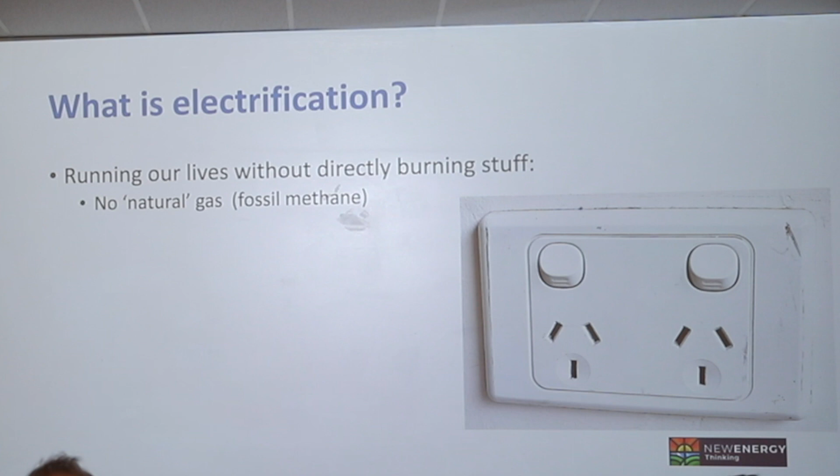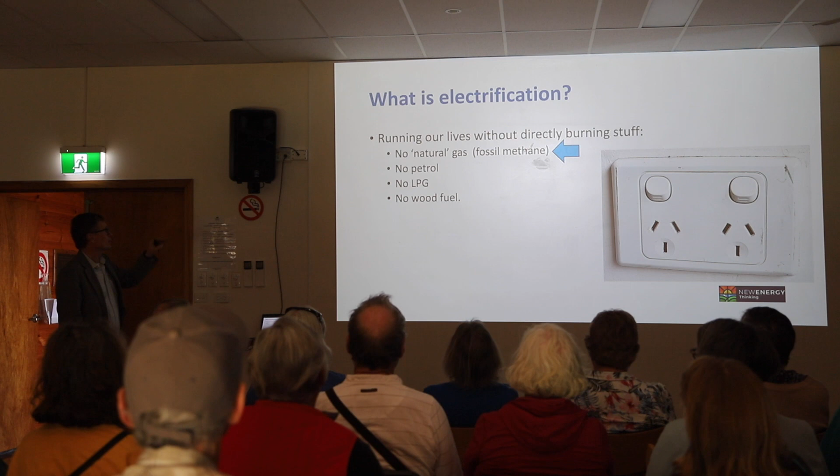So let's launch into it. So what's electrification? It's gaining some traction and some currency at the moment, this idea about running our lives without directly burning stuff. So what's that mean? No natural gas — natural gas is, of course, a marketing term for fossil methane. No petrol, no LPG, no wood fuel. So there's a whole raft of different topics there, but I'm mainly going to focus on the first one.

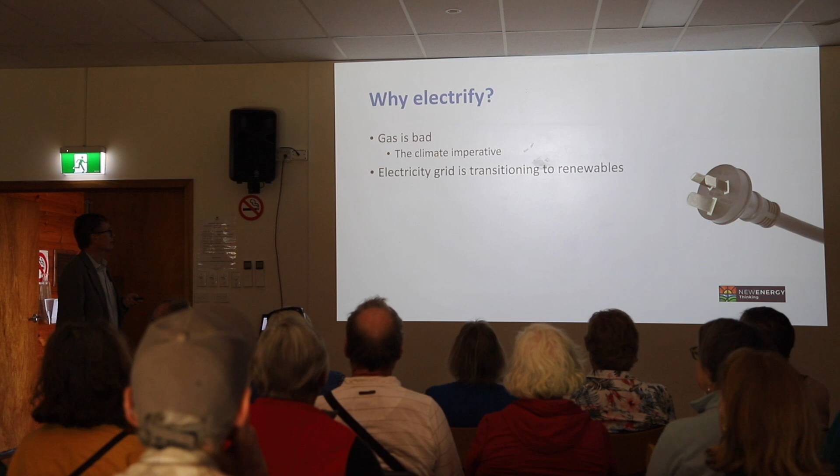Why electrify? Well, gas is bad. There's a climate imperative, and more about that in a second. Everyone knows that the grid is transitioning to renewables and that it's happening fairly quickly. To electrify is cheaper, because in conjunction with solar PV it makes our energy cheaper. Electricity is more efficient than gas.

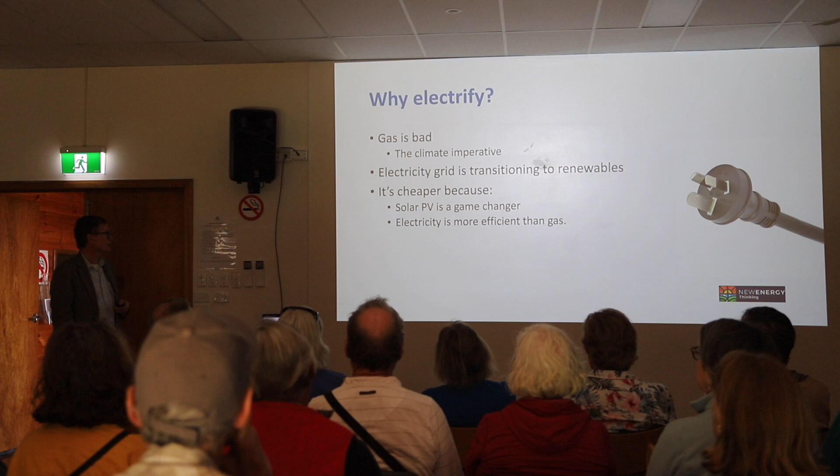And to the point about gas being problematic, I like this quote from Rachel Golden of the Sierra Club: 'There is no pathway to stabilising the climate without phasing gas out of our homes and buildings. This is a must-do for climate and a livable planet.' So that hopefully puts a sobering perspective on this exercise.

So there's a myth around gas that it's a clean, cheap fuel. The reality is that it's inefficient, and it's associated with high end-to-end real-world emissions.

Victoria's bounty of cheap gas out of Bass Strait is in its sort of twilight years. There's reports just last week about the reduction in production out of Bass Strait. And what we're not getting out of Bass Strait is made up in Australia coming out of unconventional gas fields, a lot of it in Queensland.

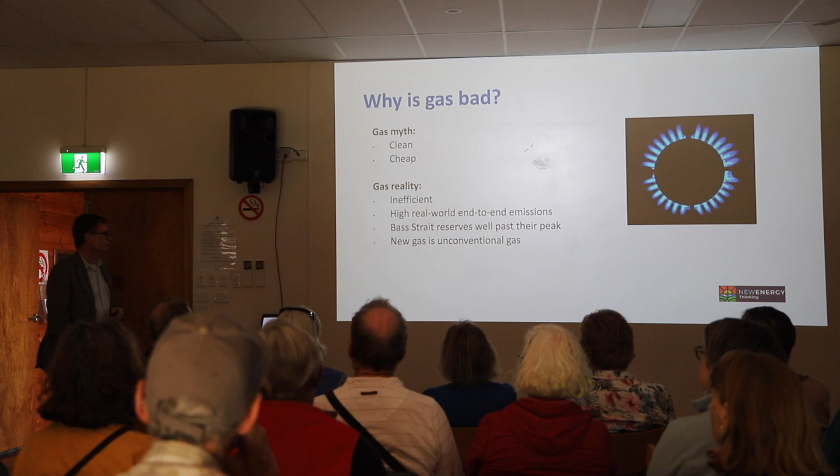Many people might not be aware, but these days the gas network on the east coast of Australia is all interconnected. So there are times when gas is pumped out of the gas fields in Victoria and ends up in Queensland. Other times it's coming the other way. In winter, when we can't produce enough per day, the shortfall is made up by gas coming out of the unconventional gas fields in Queensland.

So that gas is dirtier, and the price of gas is going up. So I just wanted to give a little bit of a picture of why I say that gas is dirty.

The emissions footprint of gas comes from a number of places. The one that most people are aware of is the emissions from the complete combustion at the point of use — that's the headline source of emissions of gas, that's what most people think about.

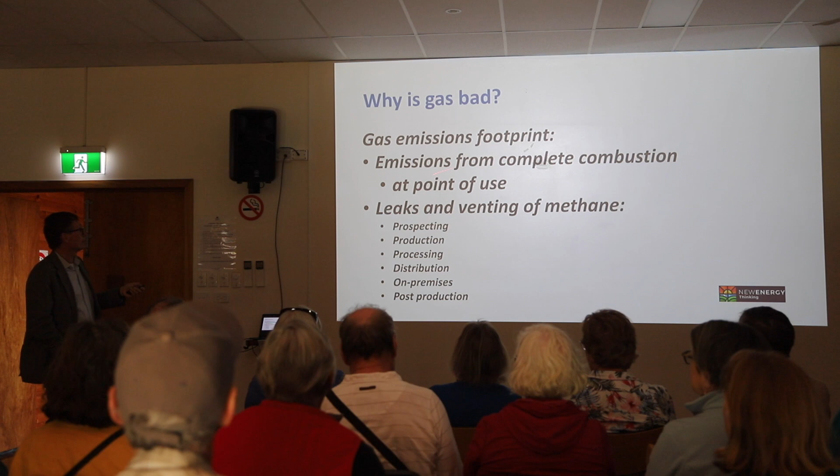But there's leaks and venting of methane in the prospecting, the production, the processing, the distribution on premises and in post-production. And a lot of that is overlooked and underestimated. That's a bigger problem than most people realise. I've been paying close attention to this for the last 10 or 12 years, and I don't see enough general awareness of that. It's not just about combustion, it's a lot about this leakage too.

To help put that in perspective, the methane that's in the atmosphere — when we talk about emissions and render them in terms of tons of CO2 equivalent, the CO2 equivalent amount of emissions is the corresponding mass of methane out of the ground multiplied by the global warming potential. So it's pretty simple. And as I see it, there are problems in the estimation of this because of the leakage I was talking about, and there are also problems on this side as well.

So just about the global warming potential, without nerding out too much, Australian standards for emissions accounting apply a global warming potential of 25 when reckoning the emissions from methane. And that's because the residence time of methane in the atmosphere is much less than carbon dioxide.

Scientists don't just have one number for crediting the global warming potential of methane. They look at two different time horizons: 100 years or 20 years. If looked at over 100 years, it's 25 times worse per kilo than CO2. But looked at over a shorter horizon, it's much worse.

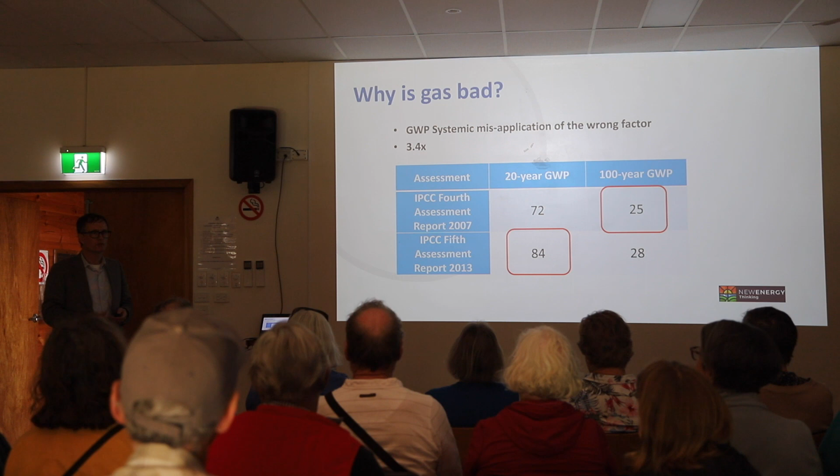So moving on—and just in case it begs the question about why we want to electrify: electricity prices are going up, so why would we electrify? Well, the answer is we still want to electrify even though electricity is going up, and that's because it's gas prices that are largely responsible for setting the price of electricity. A lot of people aren't aware that it's the marginal price of gas that tends to set the electricity price when the supply of electricity is tight, shall we say.

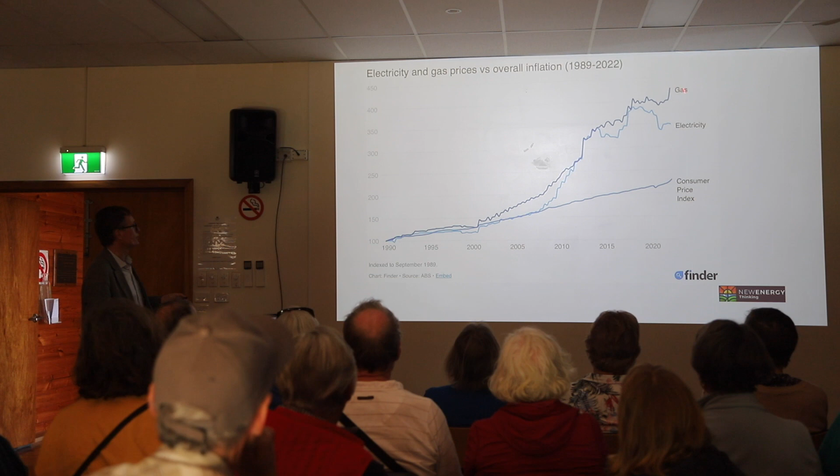And you can see in the last few years—this only goes up to about 2021—the gas prices continued up while the wholesale price of electricity came down a bit. Since then, both these have jumped up again. Thanks, Vladimir Putin. Okay, let's bring this back to a household scale.

What's a good goal for homes in this context of electrification? I suggest that it's to be net energy positive and all electric. What does that mean? Net energy positive means generating more than we consume. Of course, that's possible because of rooftop solar—it's now become familiar, doesn't need explanation. Net energy positive can also come about in conjunction with reducing our consumption. So it's that increase in generation plus a reduction in consumption, and the two together mean we can be consuming less than we generate.

When that happens, good things change. To put that in perspective: for a home that's not net energy positive, the grid is strictly a supply system—a thing we get energy from, full stop. But when you're net energy positive, your perspective about the role of the grid is different. The grid is a sharing system, not just a supply system. And that mind shift is useful because you're depending on the grid not just to give you stuff but also to take your surplus and share it with your neighbours. In that respect, the role of the grid is fundamentally different.

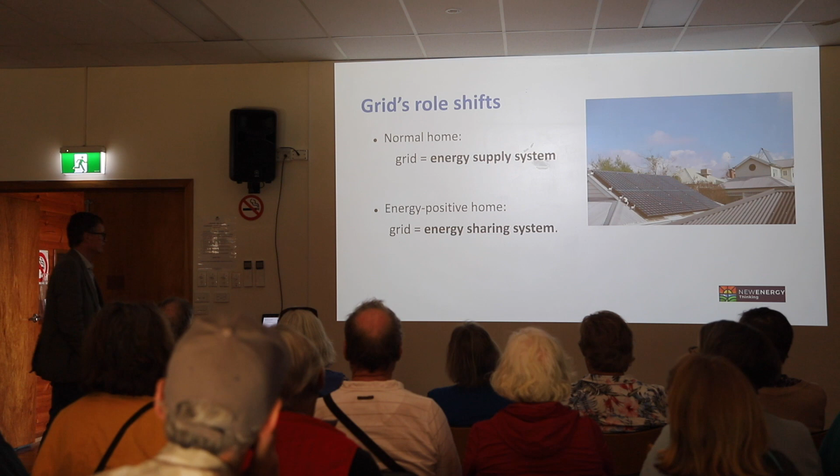The changes we make when we improve our homes involve improvements in comfort, a reduction in cost, increase in the value of a house, and a reduction in emissions associated with operating the house. So in a very real sense, the changes we make represent an investment, not a cost. We have to take this investment frame of mind, that money spent isn't just an immediate cost, it's a long-term view. We can compare it with money in our super, property, or shares.

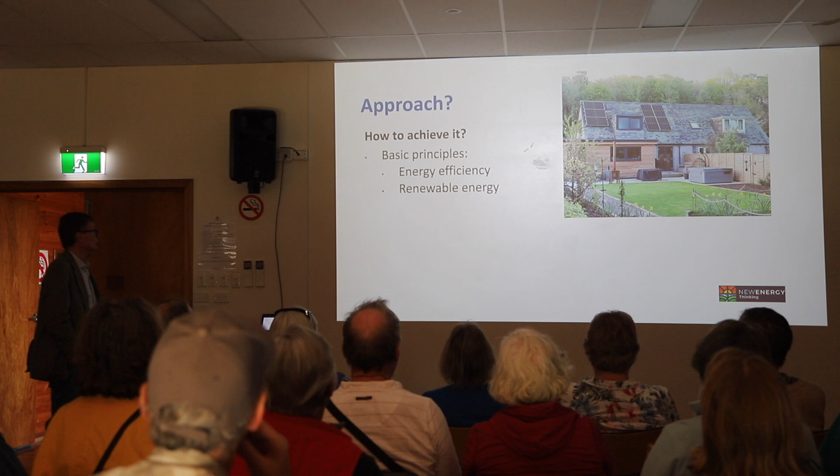So how do we achieve this? Basic principles: energy efficiency, renewable energy, and not burning stuff.

I wrote a book called The Energy Freedom Home, which Sharon's brought along a copy of. Hopefully it's available at the library. In that book I divided the whole problem up into 9 chunks, framing generating solar and the other home improvements as all part of one bigger activity. Looking at those things together holistically, I think, is important.

The first of the 9 steps is lighting, and I'm going to go through just those 9 steps over the rest of this talk, hopefully giving you some ideas about ways to improve your house, largely drawing on my own experience. I got my home off gas and made the efficiency improvements to my own house between 2006 and 2013, and since then I've been helping other people do it. So what I'm going to talk about now comes from that experience.

So, lighting. Obviously people are aware that we can upgrade old lights with LEDs. We can do that before waiting for them to fail.

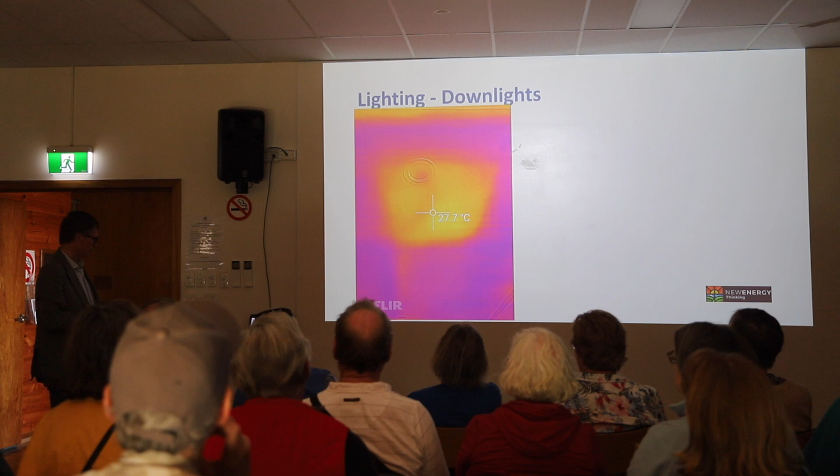So the right thing to do is... let me come back to that. This is a thermal image taken at a client's house. You can see the downlight there, and around it is a heat signature showing missing insulation. That's what it looks like on the other side. Where old lights were present, it was necessary for that insulation to stand off from the light for safety reasons — we don't want the insulation catching fire and burning the house down. Installers of insulation are very aware of that.

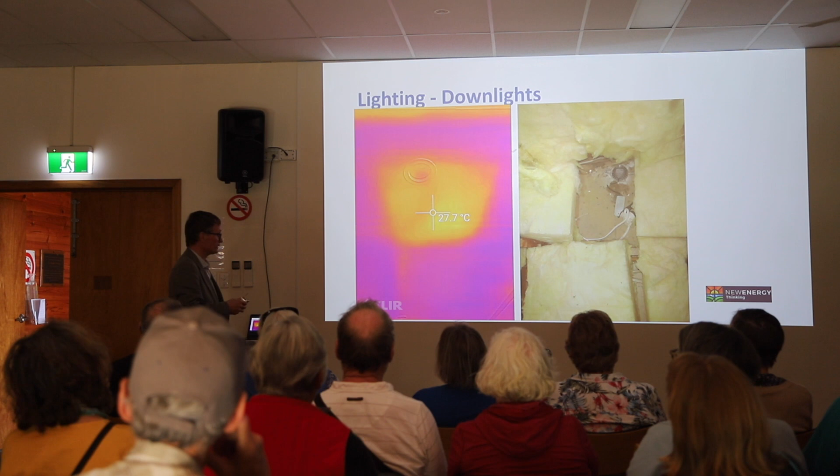Now that lights have become a lot more efficient, that risk is going away, but it's not completely gone. If one of these fittings had an LED in it, there's nothing stopping someone coming back and putting an old-fashioned halogen in there. That's the reason why you don't cover these, even though there's an LED in there, because you don't want someone mistakenly putting a halogen back in and burning the house down.

The other problem is the fact that these are ventilated. This fitting, as you can see, is gimbaled, and there's a slot around the perimeter that lets air through. This bulb itself has a ring of slots that ventilates the bulb. So perversely, when this halogen was replaced with LED, you can see present there now, it made it worse in terms of ventilation. You get that perverse problem where increasing lighting efficiency actually makes another problem worse.

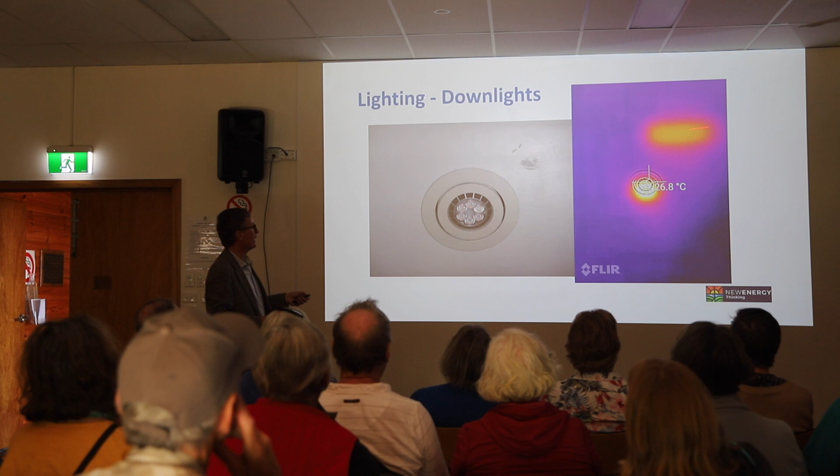So we've mentioned that lighting efficiency is a problem, that the insulation effect is a problem, that ventilation is a problem, and there's a fourth problem. In this thermal image you've got the heat signature of the light itself, but anyone want to hazard a guess what that hot blob there is? It's the transformer sitting on the plaster. Exactly — so there's a fourth problem, that the old iron core transformers themselves are a heat loss, an energy loss.

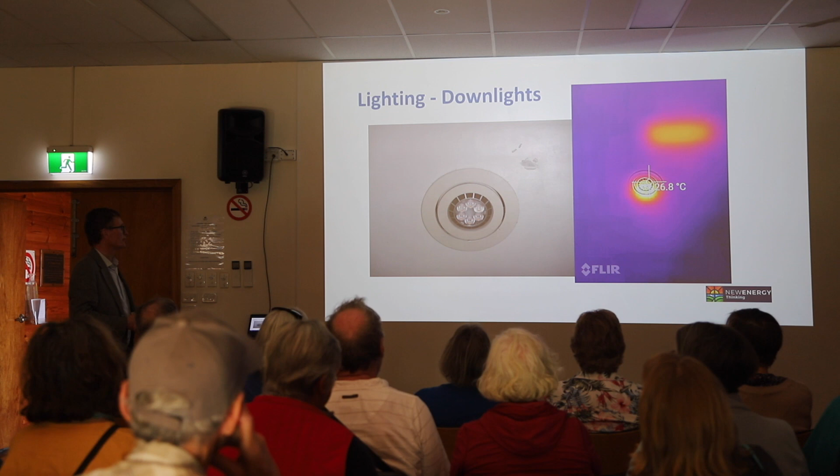So the moral of the story is, don't just replace the bulbs — you need an entire new fitting. This is a typical one, which I call a sealed unit, so there's no replaceable bulb. What you want is for it to be IC rated — IC stands for insulation contact. As the name suggests, if it's rated IC, then it's safe and legal to cover. If you don't see that rating or that picture, then don't cover it, even if it's an LED.

So yeah, I'll pass that around.

This has a little box that's electronics, so that would go on top of the insulation, and an electrician would have to come through and put a plug base socket in the ceiling. Then these are a plug in socket arrangement, and if this fails, it's just replacing a device plug in the socket, so you don't need an electrician to replace the failed units. These aren't much more expensive than just a halogen or an LED bulb, so that's why replacing the entire fitting is the right thing to do, not replacing the bulb. I'll pass that around.

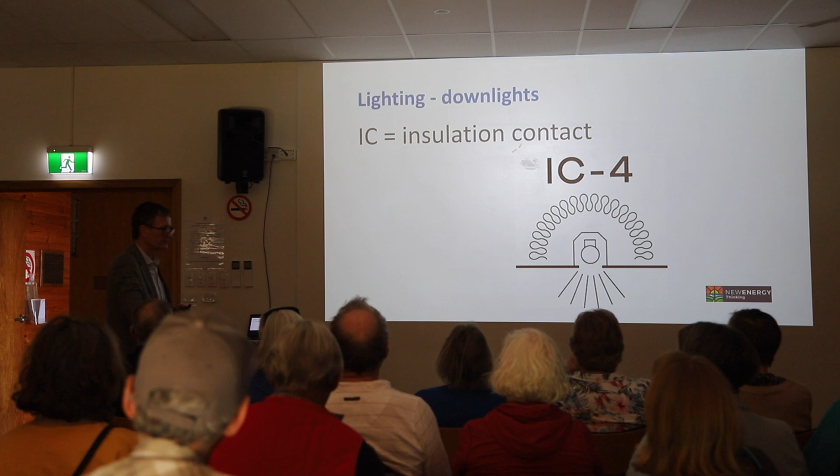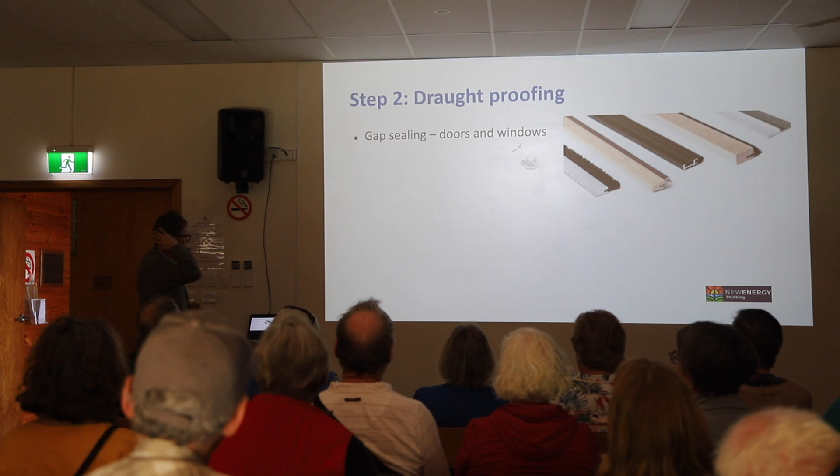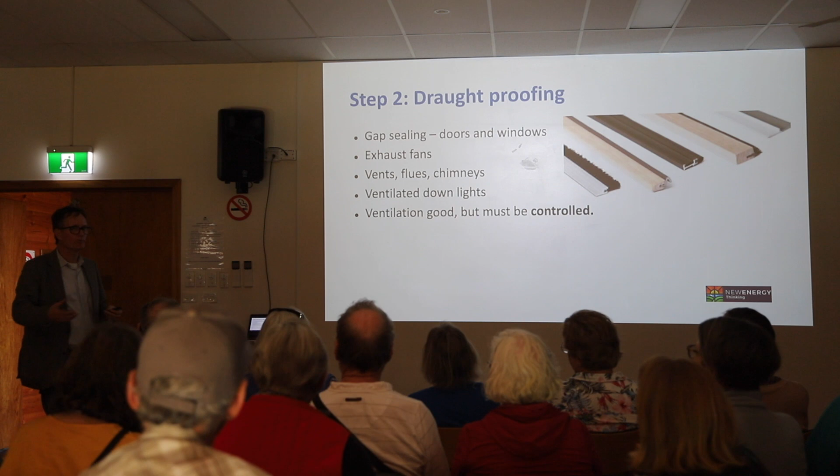Moving on to the second step, draught proofing. This is something that's often done badly. Gap sealing doors and windows is important - exhaust fans, flues, vents and chimneys, ventilated downlights. There are lots of sources of draft in a house. Ventilation is a good thing, but it needs to be controlled. On a really hot day or a really cold day, you want to be able to close the house up tight, because unless it's closed up tight, you're going to exchange a lot of air with outside, and you're not keeping the conditioned air where it should be. Controlled ventilation is had by opening windows, not by letting air through a hole in your ceiling that shouldn't be there.

Pipe penetrations, like under a sink where something might go through the floor, or chimneys - lots of air can exchange with outside through the chimney. Wall vents - unless you've got a source of combustion within a room, these aren't necessary. New houses aren't built with them. Old houses were built with them because of the possibility those spaces had sources of combustion. No source of combustion, no need for these.

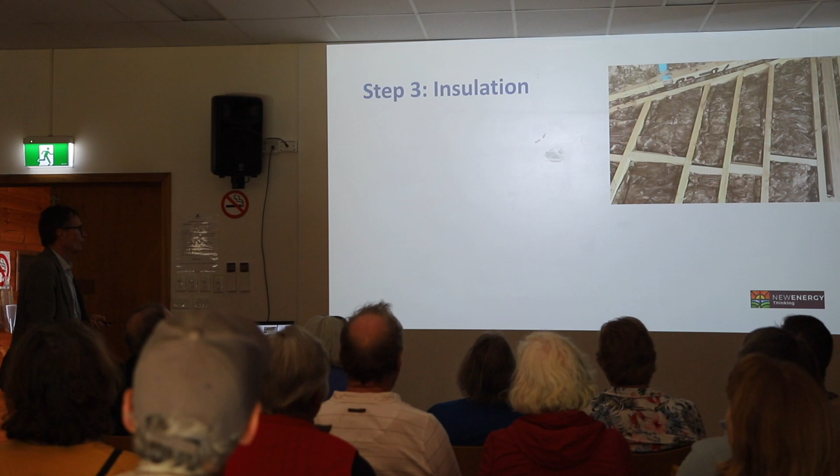Insulation. Everyone understands the role of insulation in ceilings, but it's often done badly. The thing to appreciate is that common guidelines are a minimum - when we talk about 6-star homes, that's not an exemplar of great efficiency. Ceilings need a net effective level of about R5, that's a good goal.

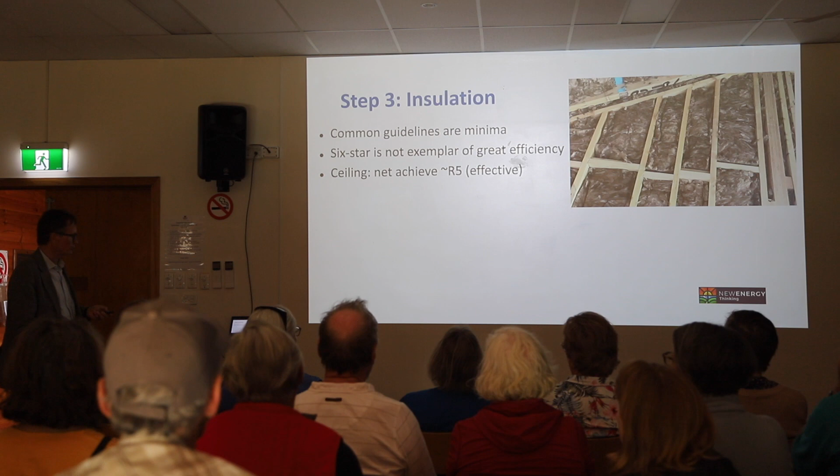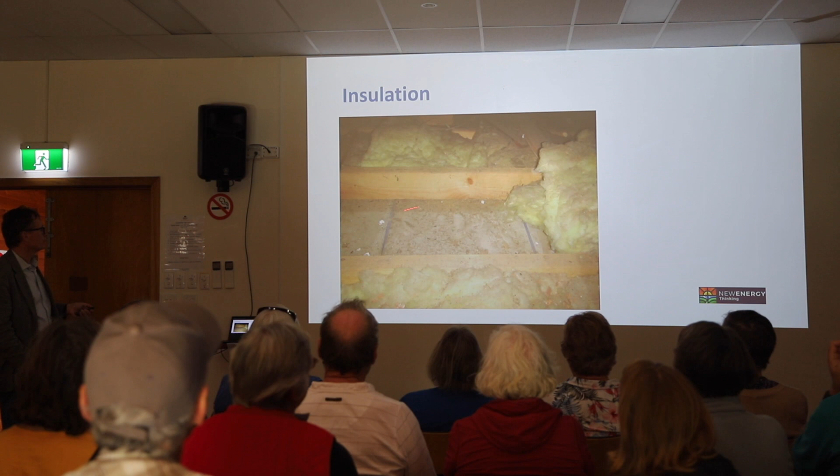Walls and floors try for about R2.5, but in practice I get into people's roofs many times a week, and I see this sort of thing, where there's insulation that's been removed for no good reason.

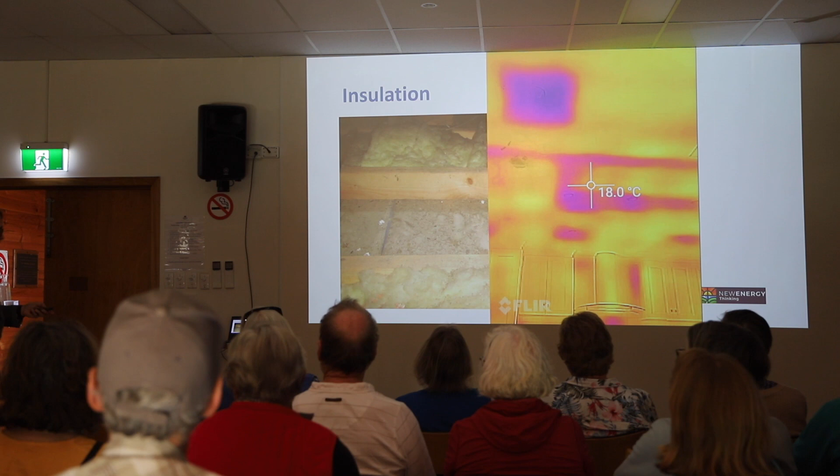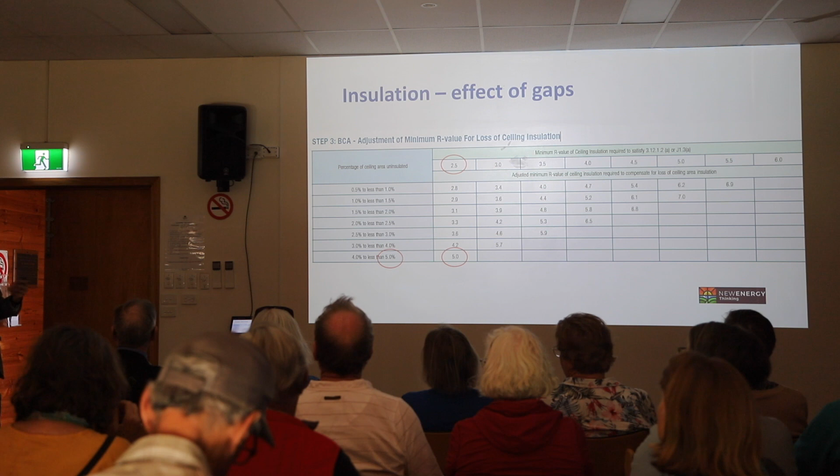Believe me, I go into the roofs of new houses often, and I see a lot more than 5% uncovered. So as a rule of thumb, most houses, even new houses, aren't achieving more than about a third of the level of effective insulation people think, because it's not uniform and continuous out to the edges and around things like ceiling vents and downlights and other fittings.

Windows, on a per square metre basis, are a weak link in the thermal envelope of a house, so it's important that they not be too big. Everyone's aware of double glazing - two layers with something in the middle - as a way of improving window performance. You might not be aware of secondary glazing, we'll talk about that in a sec. Curtains and blinds also play an important role, as does external shade.

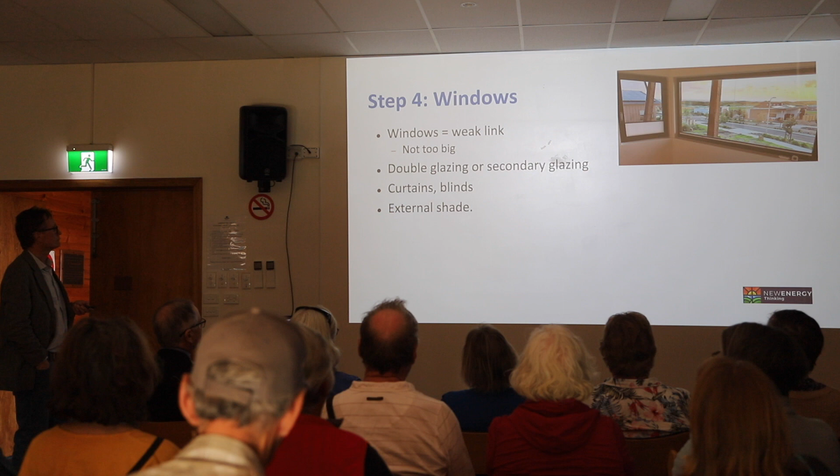This is a picture taken from a client's house a few years ago. This house was only a couple of years old when I was called to inspect it. The people thought they'd built an efficient house, but it wasn't performing well. It was up near Daylesford, and they asked me to come and find out why their house was no good. Anyone want to hazard a guess why that's a problem? No window coverings, and too much window - just way too much window.

Yeah, even though that's north facing, it's too much glass and nothing to cover it when the sun goes down. So: oversizing, and no window coverings.

I mentioned secondary glazing. There's more than one way to get the effectiveness of double glazing, and secondary glazing is the idea that we can add another glazing layer onto existing windows. The picture shows a sample of a product called EcoGlaze that I've sat in someone's window reveal, just to demonstrate how it sits. You can imagine that extending in all directions and adding another layer, with an air gap between it and the glass. This is held in magnetically.

There are different variations of this system that suit different types of windows. This version of the EcoGlaze product suits fixed windows - there's another one for sash windows, another for awning windows. But the point is that you don't need to throw away existing windows entirely and replace them with new double glazed ones. You can get decent performance and retain the investment in your existing windows, without discarding stuff that's otherwise okay.

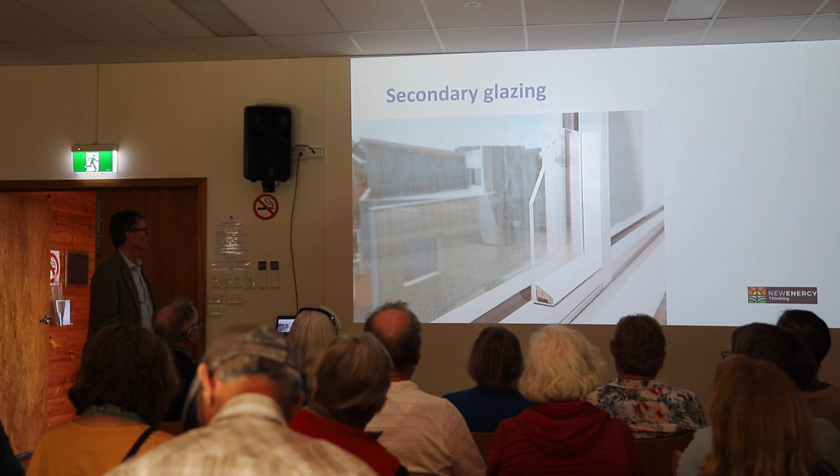Window coverings: the way I look at it is that double glazing or secondary glazing is necessary but not sufficient for thermal performance.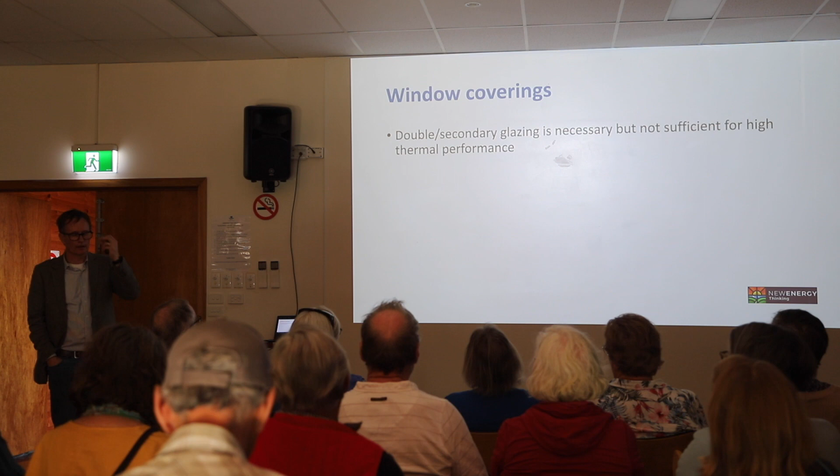I tell people that going from single glaze to double glaze takes windows from being terrible to just being merely bad. It's important to realise that double glazing by itself is not a good insulator. That surprises a lot of people because they have double glazing up on a pedestal as being amazing, but in practice it's nowhere near as good as a wall. So going from single to double is necessary, but it's not enough.

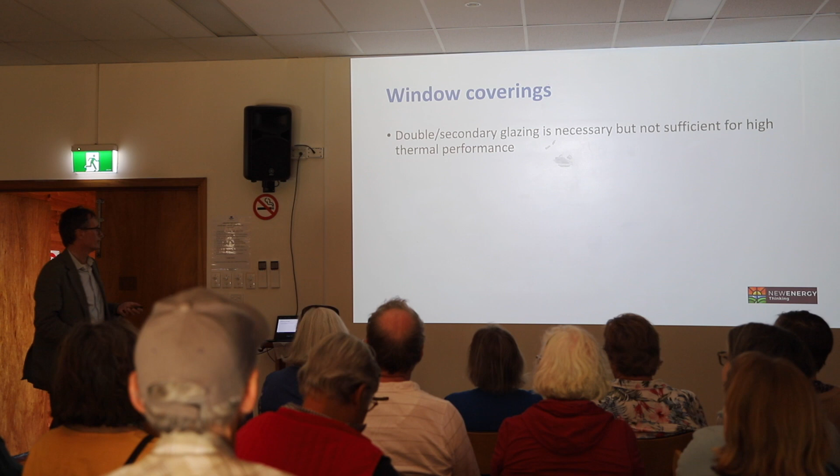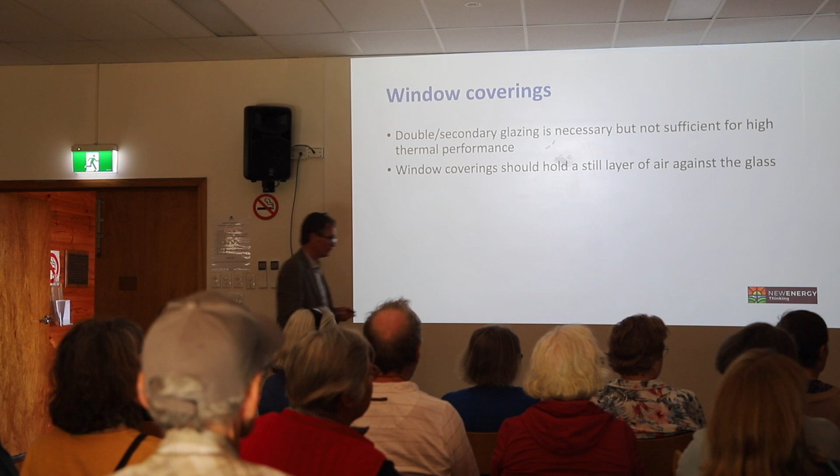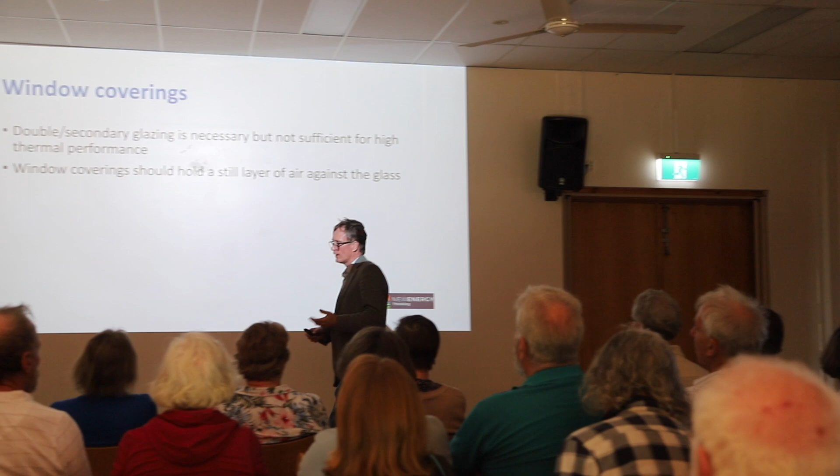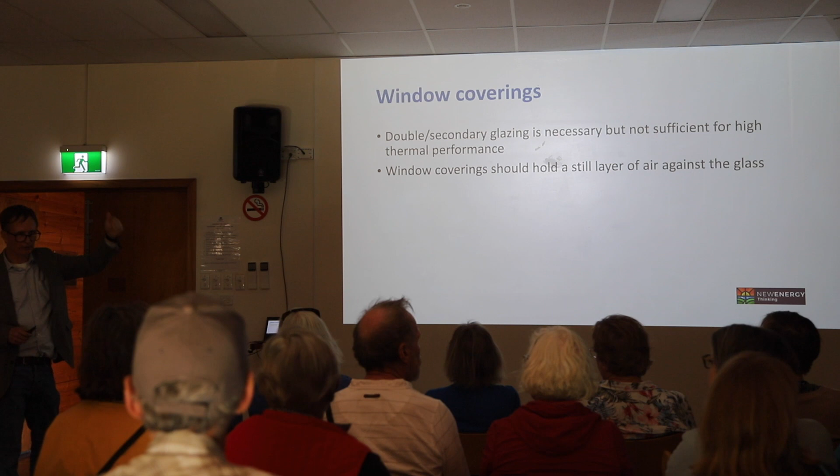We need window coverings that can hold a relatively still layer of air against the glass. Take these roller blinds, for example. These are an example of what not to do, because air between the glass and the blind can pass easily up behind the roller and over the top. And to the extent that air there wants to move, it's going to move vertically, driven by the temperature difference between inside and out. That's called natural convection. In a winter situation, the inside air cools in contact with the glass and sinks, drawing in air over the top. With roller blinds like that, that movement is very easy, and that's what you want to stop.

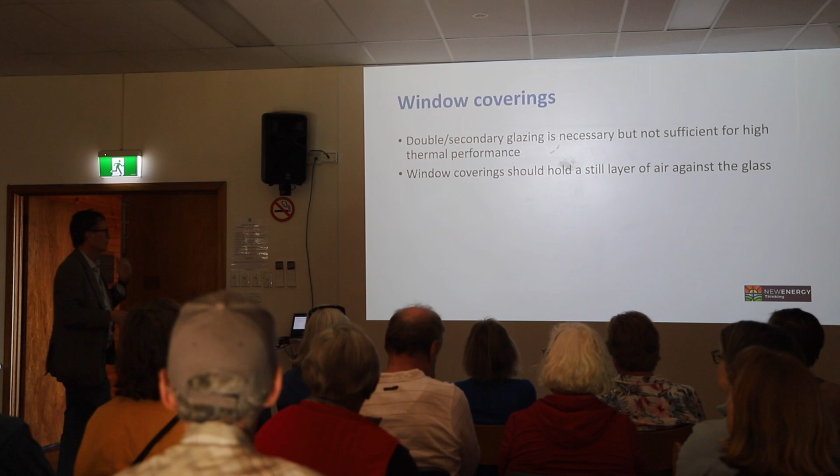That's why internal window coverings are really important, and choosing the right ones can make a huge difference. Cellular blinds are the best.

Appliances and cooking: you may have redundant devices, so turn off things you don't really need. Consider efficiency when buying - use the star ratings. Induction cooktops are much better than gas, with much higher efficiency.

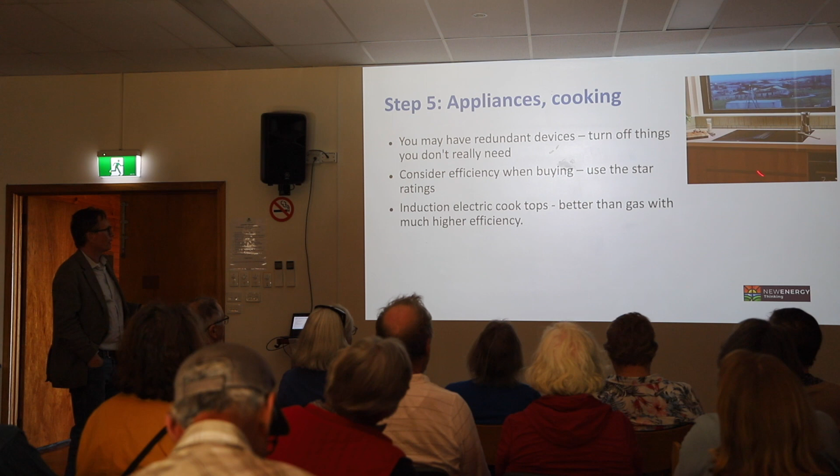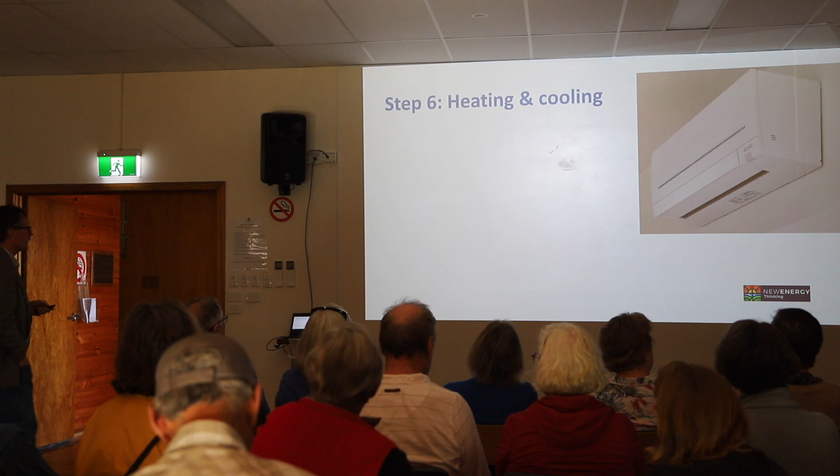Heating and cooling. Obviously a lot of energy is used by heating and cooling, and it's really important. My advice is to avoid ducted systems. Ducted systems are very common, but they're associated with lots of problems. I recommend we use heat pumps as the fundamental technology for heating and cooling - that's the technology in reverse cycle split systems - and we want to get rid of our gas heating.

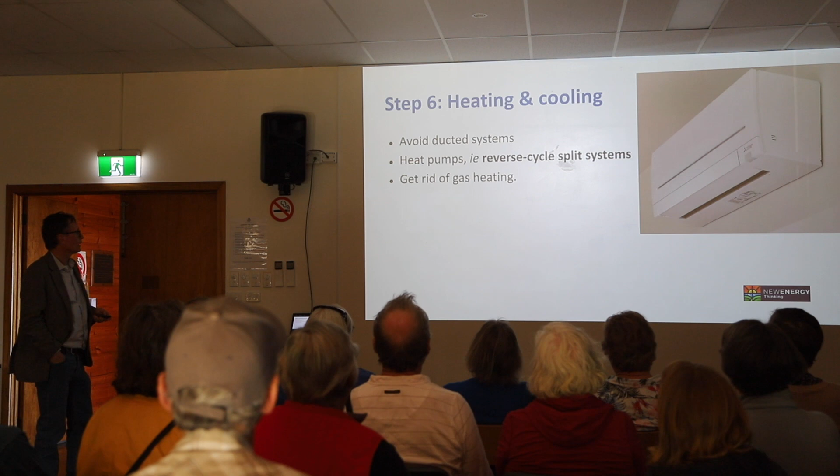So the solution is a multi-split. A multi-split is an arrangement of a split system where one outside unit drives multiple inside units, and those inside units can be of different types. You've got your classic high wall mount, a low wall mount unit, what's called the bulkhead unit, and the cassette unit. So there's different ways of delivering that heat into a house, all running back to one unit on the outside.

It's much more efficient than ducted because, well, there are lots of reasons, but to cover the main points about the problems with ducting and why this is better: ducting involves whole-of-house circulation - the air coming out of every outlet has to go back to a single return point. So for normal operation, you can't have doors closed. I mean, how silly is that? You've got outlets in bedrooms - when the system's on, you can't achieve proper operation if the bedroom doors are closed.

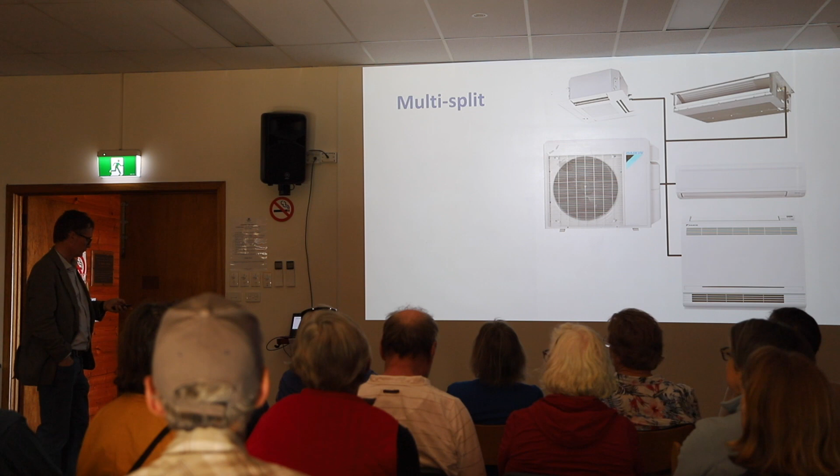That's why I like split systems. This is from my old house, a 3-bedroom, 2-living-area period house in Melbourne. We replaced the ducted system with 2 multi-split installations - there were 2 outside units, this one and one along the same wall. A smaller number of outside units means you can put them in less visible places, and we ended up with 7 indoor units. That did the whole house.

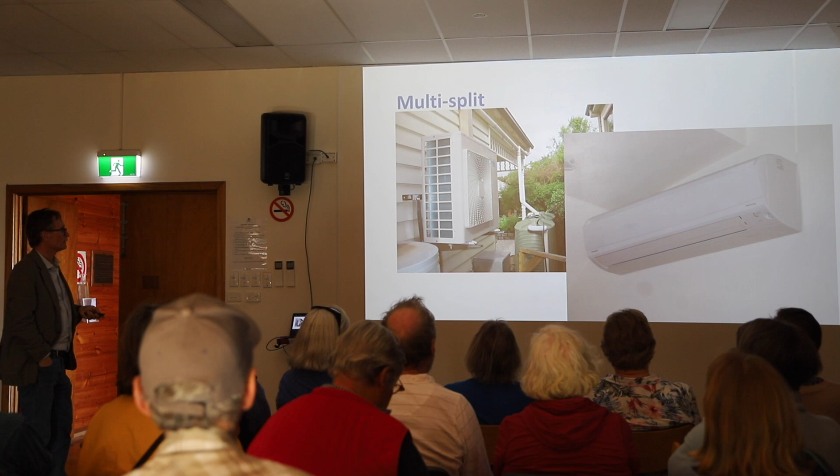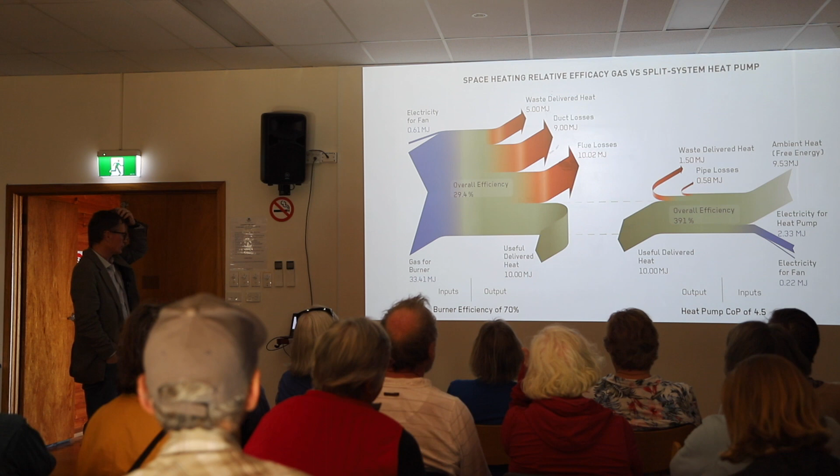At the risk of getting a little technical, this is a chart I came up with for a report I was involved in writing for Beyond Zero Emissions back in 2013, so 10 years ago now. It compares a legacy gas ducted system with a heat pump, in both cases based on 10 megajoules of useful delivered heat.

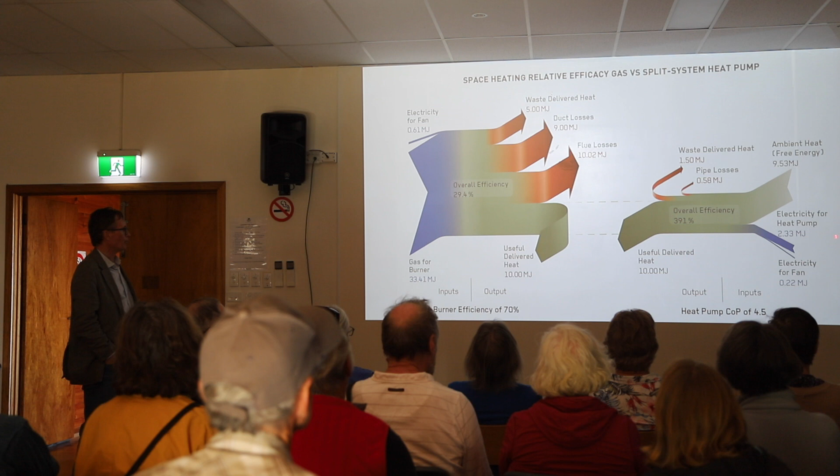Looking at the ducted system on the left, to get 10 megajoules of useful delivered heat you need 33 megajoules of gas in the burner, with flue losses, duct losses, waste delivered heat, and a bit of electricity for the fan. So you need all this energy coming in to get this much out. With a split system delivering the same heat, you only need this much energy, because most of the heat delivered is coming from the ambient environment. That's the beauty of a heat pump - it's literally pumping heat energy out of the air, needing much less energy from the mains than it extracts from the air.

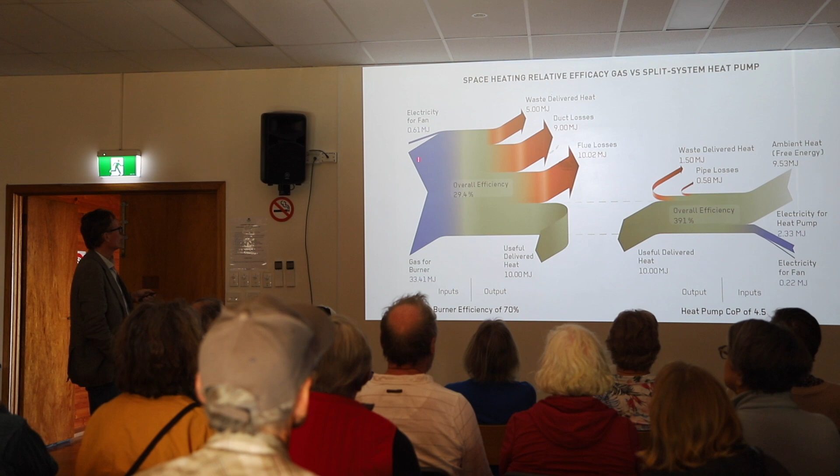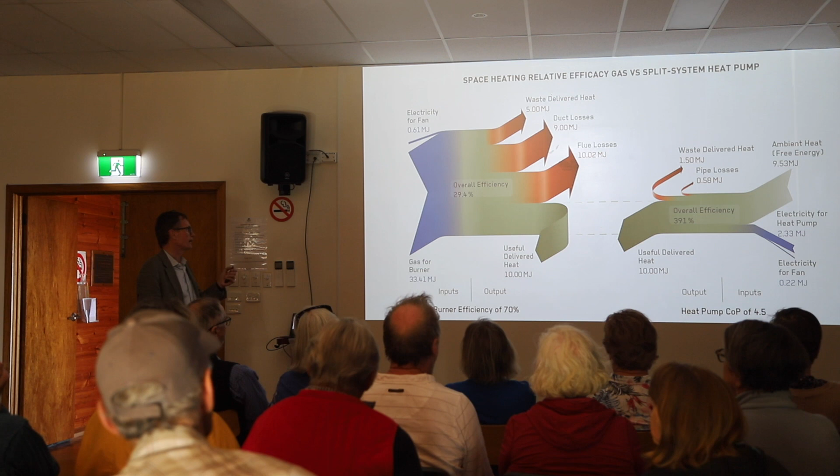So comparing the efficiency of the legacy gas ducted system to the split system, we're basically comparing the width of this with the width of this, and it's about a ratio of 13 to 1 in that example. So even if gas is cheaper per megajoule, this is a cheaper service to operate overall because it uses so much less energy.

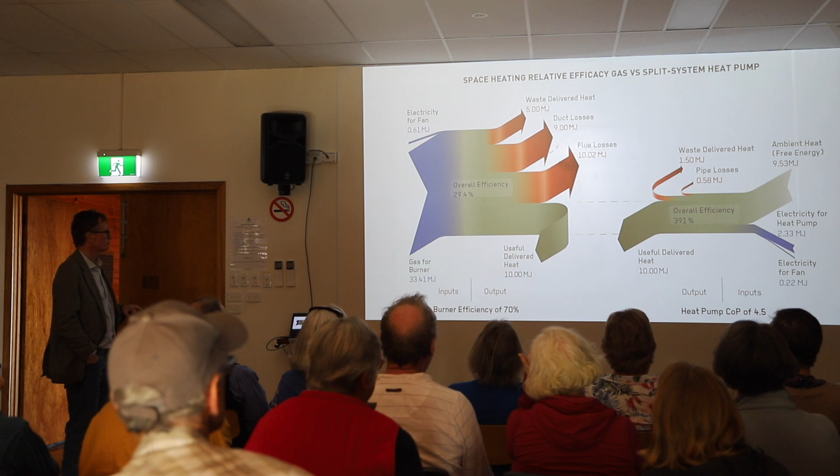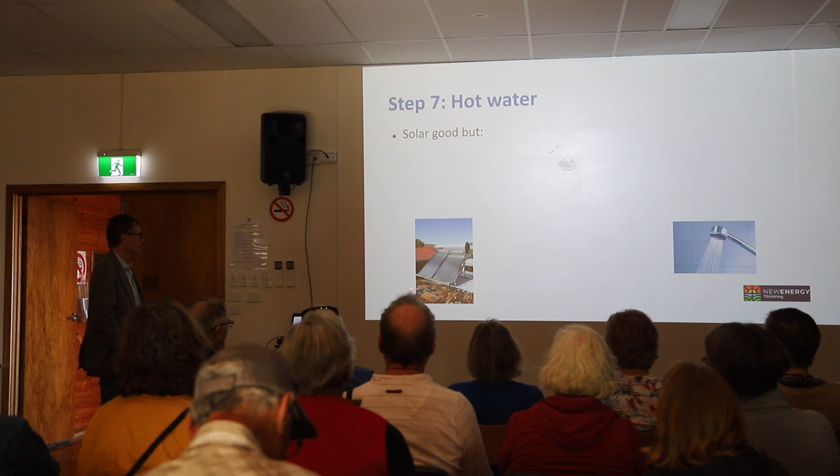Moving on, hot water. People are aware of solar hot water systems like this one, and they're okay, but there's a high wintertime boost energy needed in the cooler states of Australia. In other words, one of these systems working properly over a year will use quite a lot less energy, but in winter it's still using a lot. So you've got that big seasonality to the energy use of these.

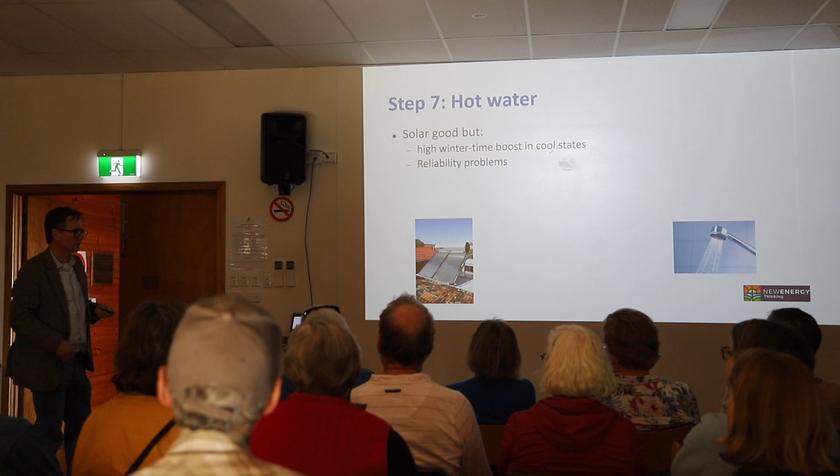Heat pumps, on the other hand, are a versatile and efficient way to do it. This is an example of a split system heat pump, where the heat pump unit looks like the outside part of a split system air conditioner, but instead of pumping heat into the house, it's pumping heat into the tank. From then on, it's just like having a regular hot water service, hot water out of a tank.

Comparing a working solar hot water system with one of these, the overall energy use is comparable, but the seasonal variation is much less. So these are much better in winter than solar hot water systems.

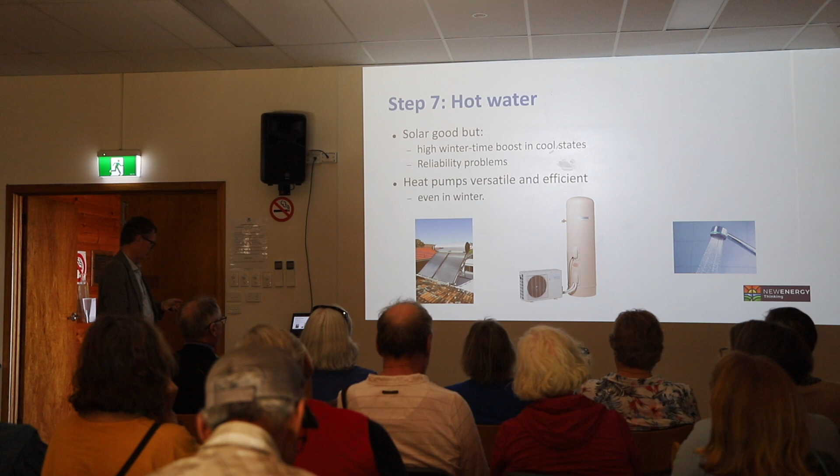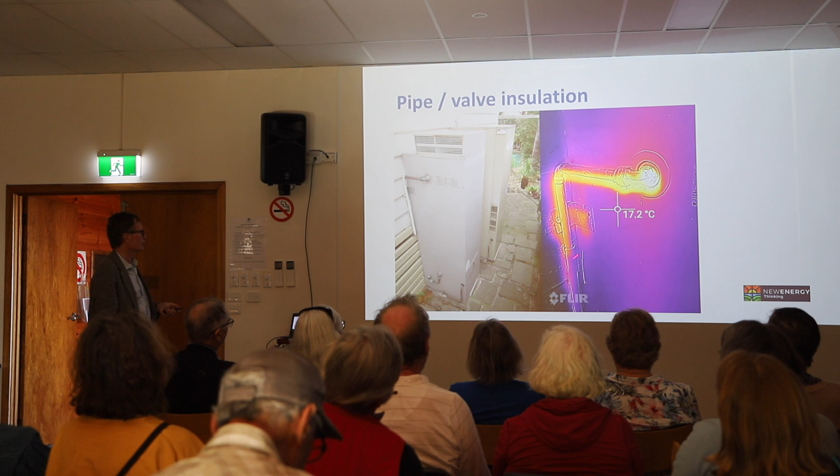Lots of houses have poor pipe and valve insulation on their hot water, regardless of the energy source. This is a thermal image showing heat loss down the pipe. This is the pressure relief valve that every hot water tank has, and on it is what's called a valve cosy, which I have here somewhere.

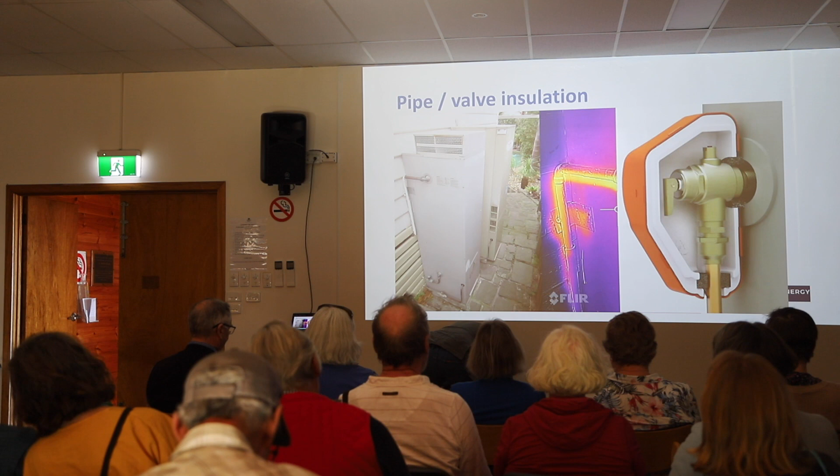What happened to it? Doesn't matter. There's a connection between this product and the last film we saw.

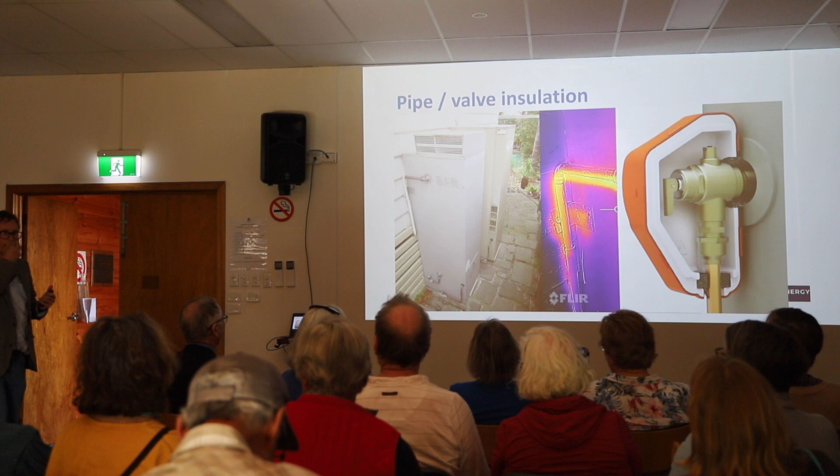The GP in that story, Malcolm McKelvey, actually owns the business that makes these. So I give these to my clients when I assess a house, and I buy them off Malcolm. Interesting story there - the people that originally designed and produced these were going out of business, and no one was going to buy the business off them, so these were going to stop being available. Malcolm stepped in and said, okay, I'll buy the business because it's just so important that these as a product are available. They don't save a huge amount of energy, but it's an easy win. For a small amount of dollars, you're reducing the heat loss out of the tank. It's an easy thing to do.

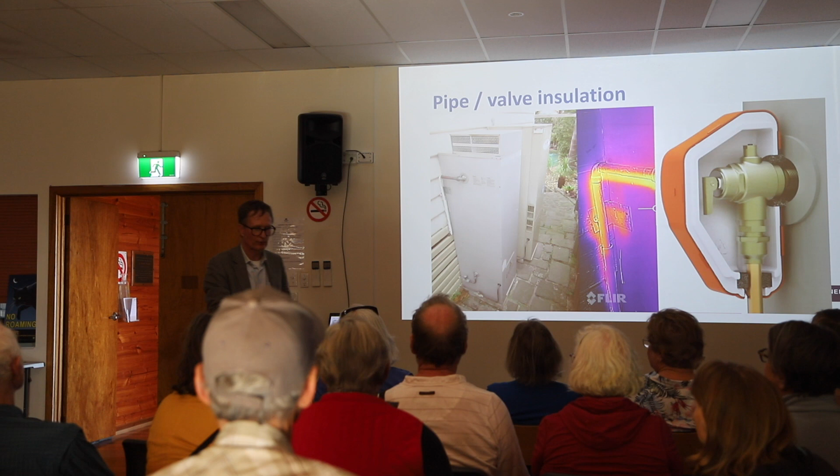Where do we get them? valvecosy.com.au. Thank you. Actually, there it is. So I'll pass that around, you get the idea. It's a very simple principle - it just clips around the valve.

So we need to monitor and control the energy used in our houses. For example, we can know what our baseline energy is, and how much your house consumes, how many watts of power the house might typically be using, like when everything is off. There's a residual amount of power used by smoke alarms and clocks and things on standby. So if you've got something that monitors that energy in real time, when you go to bed and you see that, oh actually, I'm normally using 200 watts and now it's using 500, oh, I've left something on.

The power distributors in Victoria all have a web portal that everyone can connect to and can see the smart meter data from their meter, not quite in real time, but generally up to yesterday. So if you're not already on it, I encourage you to get on it. We're in the AusNet area here, so I think it's called My Energy. If you get onto that, it's useful.

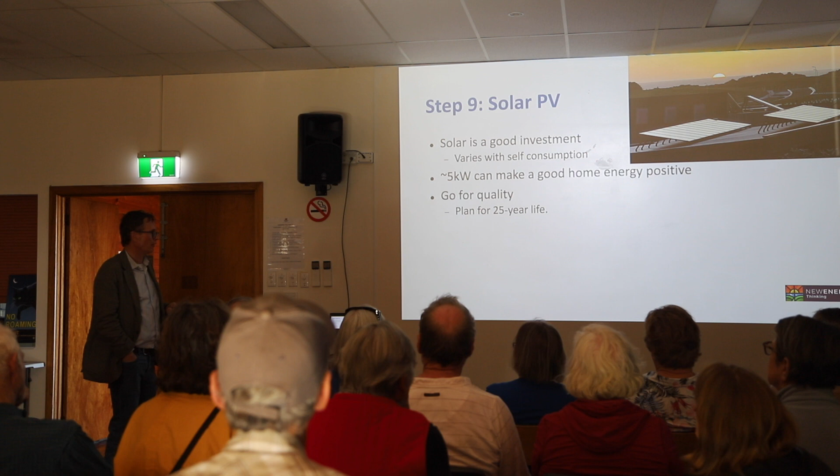Solar's a great investment. The extent to which it's good as an investment varies with how much you can consume within your own home. My own experience shows that 5 kilowatts on the roof can make a good home net energy positive. Go for quality, plan for a 25-year life. In other words, think of the cost of the rooftop solar as an investment - think of it as buying 25 years worth of electricity paid for up front. That's the best way to think about it.

And with that sort of frame of mind around it, there's a rule of thumb that I've come up with that helps you estimate the lifetime cost of that rooftop solar energy over the 25 year period. So we take the specific cost of the installed system and divide by 300. When I say specific cost, I mean cost in dollars per kilowatt of capacity. And 300 is the magic number that I've come up with that applies in Victoria.

So let me give you an example. Imagine a household gets a 5 kilowatt system that cost them $6,000 up front. So dollars per kilowatt, that's $1,200 - that's 6,000 divided by 5. So you divide 1,200 by 300 and you get 4. That's the cost of the energy over 25 years. So if we assume a 25-year life, with the amount of annual generation we expect to get from the panels, then every kilowatt-hour you generate is costing you 4 cents.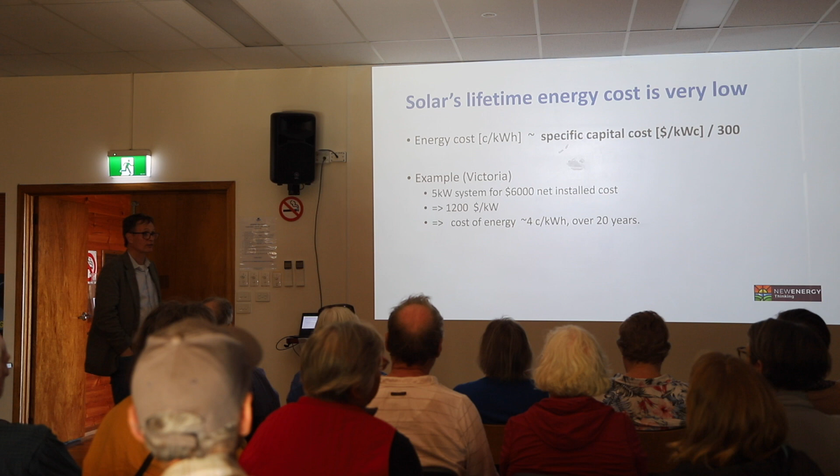Yes, it can significantly reduce the remaining consumption that you have from the grid, but they're not cheap. So batteries can give a significant reduction in grid consumption, but they can also give blackout protection, and they can also give environmental benefits because of reduced impact on the grid.

So whether a battery makes sense for you comes down to the question of why you're doing it. If you're doing it because you think it's going to pay for itself over an arguable 10-year life, say, then you might be disappointed. But if you're doing it because your power is unreliable, then by all means, you get that other benefit as well.

So, yeah, I put my own solar in to be battery ready, and then was in the storms in 2021, mid-2021, when we were out for a couple of days, and then we decided to pull the trigger and go ahead and get the battery. So I'm happy to have a battery, and it does reduce my costs significantly. But if I was just doing it for economic reasons, I'm not guaranteed on it covering the cost of the battery over the life of the system.

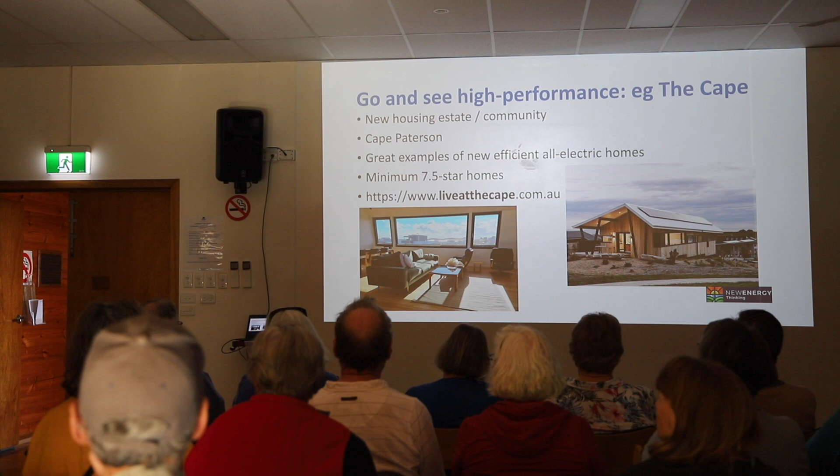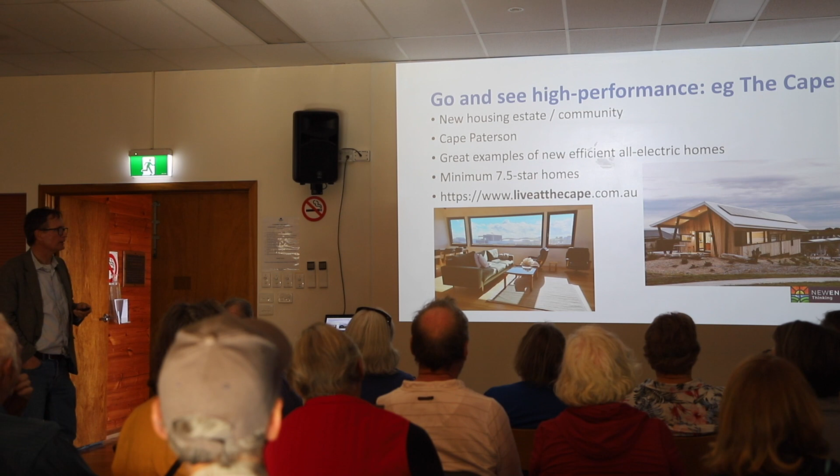And so it's currently set up, the estate is currently not open generally for seeing the houses, but the display home, which happens to be this home you can see through that window there, is open many days a week as a display home. You can just drive around the streets and see what the houses look like and get a sense of what good contemporary high-performance homes look like.

And this year we opened for Sustainable House Day, and we'll probably do that again next year. So if you want to see homes up close and personal and see what high performance looks and feels like, come along next year.

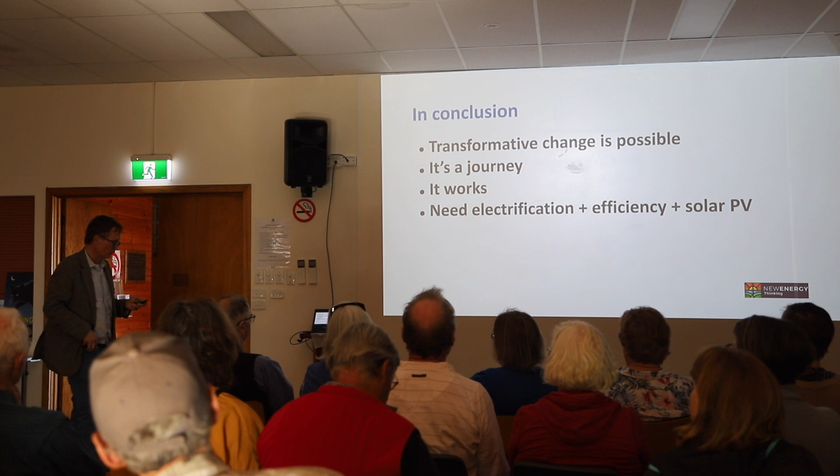So electrification isn't just about switching to electric. I think and encourage people to look at it as switching to electric, doing solar and efficiency all together. And when that's the case, good things can happen. It all just makes sense. Any questions?

Yeah, a hypothetical, Richard. I'm thinking of a young couple, proverbial young couple, facing high cost of living. If you've got an inefficient house, struggling with a mortgage, and they can't afford more than $6,000 to spend on efficiency and saving on energy and so on — would you suggest that they put in a solar system? I can't afford any more. Or spend the money on a range of the other options that you presented before?

The low-hanging fruit is nearly always draft proofing. It's low cost. Draft proofing can be done quite inexpensively, and it has an immediate impact. So in your hypothetical $6,000, you'd spend less than $1,000 on good quality draft proofing.

Beyond that, it's hard to generalise. I'd have to see the house, but a very, very common scenario is that the ceiling insulation is in very poor condition — there are sufficient batts already in place, and by very simply making good the material that's there, you can effectively double or even triple the effective performance of the ceiling insulation at zero cost, or very, very little cost, just by plugging the gaps.